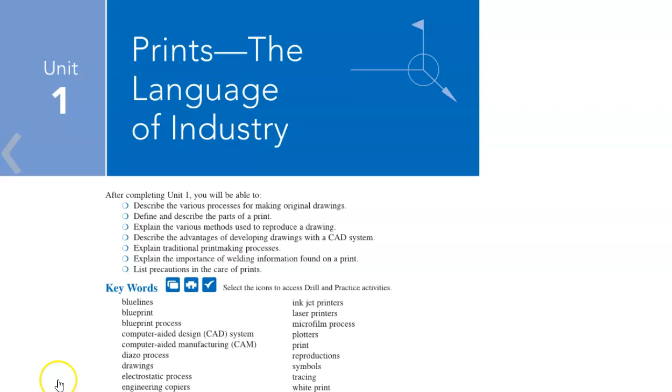Unit 1, Prints: the language of industry.

Drawings are used by the welding industry to communicate ideas in graphic or picture form. Drawings are often the only means of showing the construction of complex products and structures. Drawings are called the language of industry.

It is a precise language that utilizes symbols. Symbols are lines and figures that have meanings to accurately describe the shape, size, material, finish, and fabrication of an object. The symbols are standardized and used as a universal language around the world. This standardization makes it possible to interpret and understand drawings made in other countries.

Original drawings are seldom found on the job site or in a factory. They would soon become worn or soiled, making them difficult to read. Also, workers at different locations producing the various parts or sub-assemblies of the product or structure each need a set of drawings. This means that several sets of identical drawings are needed at the same time. Drawing a set of plans for each person who needs them is impractical because of the cost.

Creating new originals to replace drawings that are damaged or ruined is also costly. Reproductions or prints of the original drawing or CAD model are used in these situations to ensure quality in the production and fabrication of parts. Version control of the prints is critical. Prints often will have a version or revision number that indicates the most recent print revision.

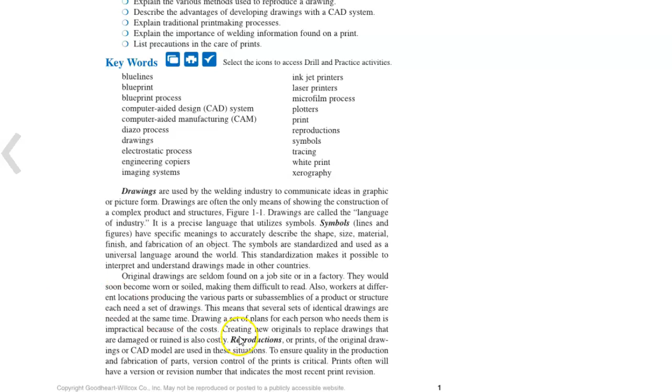Evolution of making prints. Before the development of computer-aided design, or CAD, systems, a high-quality original drawing had to be created. The original drawings needed dense and uniform lines for good reproductions. Manual drawing or drafting was an important skill used to create these drawings from ideas developed by engineers and technicians. However, manual drafting was time-consuming and editing required redrawing.

Now, drawings are most typically created using the tools of a computer-aided design system. A CAD system is a combination of hardware and software that allows drawings to be drawn, viewed, and output, printed or plotted electronically. CAD software programs provide drawing, editing, and dimensioning commands and other functions for use in developing original drawings.

Manual drawing techniques are sometimes also used. However, the process is slower and less accurate than using a CAD system, and the quality of the drawing is dependent upon the drafter's technique.

CAD systems: the growth in the computer field has had a direct and significant impact on the drafting field. The CAD system allows the designer to modify and manipulate the original drawing quickly. Instead of paper and pencil, the changes are made on a computer screen and saved on the storage media of the computer. The saved drawings may be transmitted electronically or retrieved and made into paper prints.

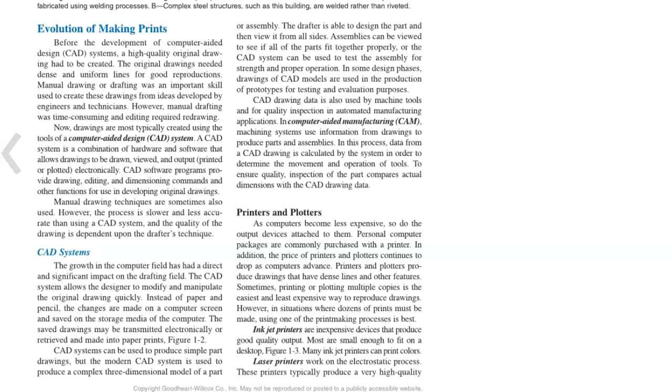Laser printers work on the electrostatic process. These printers typically produce a very high quality image. Many laser printers are capable of printing large size drawings while maintaining a high quality image. Color laser printers are common.

Plotters are most commonly used to make paper drawings from CAD work. There are two types. Inkjet plotters are similar to inkjet printers, except they are used for large format prints. Pen plotters use pens to reproduce object lines. These devices duplicate the motion that a human hand might make while drawing. In other words, they draw lines instead of printing dots on the page.

Pen plotters produce high quality work, but they are fairly slow. Both inkjet and pen plotters are capable of color output.

Older methods of reproduction. Tracings were commonly made by manual drafting when prints were needed. The first step in making a tracing is to draw the part on a translucent or somewhat see-through material. Many types of this material are available in sheet or roll form.

Many drafters made original drawings on the tracing material that would be used to produce the copies. For more complex jobs, the layout was usually traced from the original drawing. This is where the term tracing comes from.

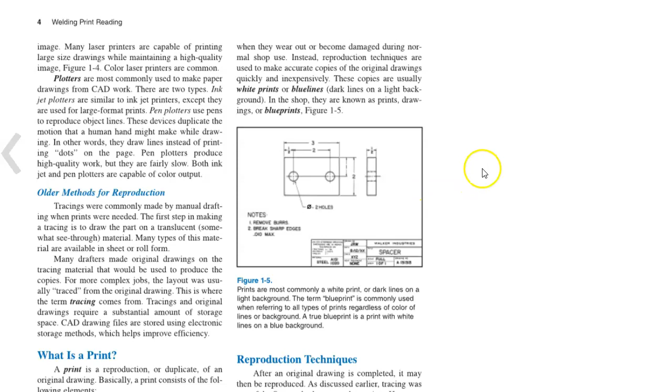Reproduction techniques. After the original drawing is completed, it may then be reproduced. As discussed earlier, tracing was one of the first methods to reproduce prints. However, now prints from CAD drawings and models are generated electronically by a computer.

Drawings can also be reproduced by using xerography or making microfilm from drawings. Older printmaking processes employ a chemical reaction to produce prints.

Xerography is a printmaking process that uses an electrostatic charge to duplicate an original. This xerography process is commonly called the electrostatic process. This process is based on the scientific principle that like electrical charges repel and unlike charges attract.

The electrostatic process exactly duplicates the original. A copy can be enlarged or reduced in size from the original if needed. Unlike older processes, the original drawing does not have to be on translucent material.

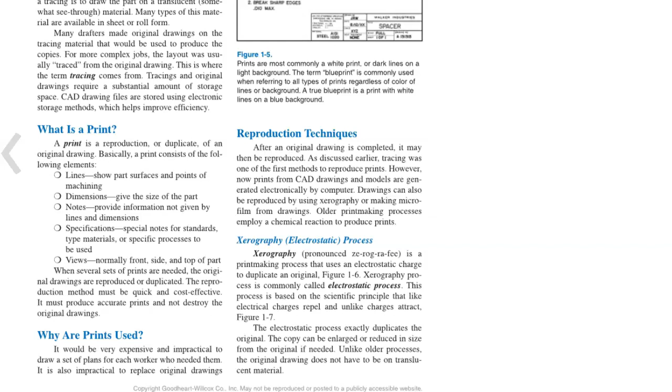Large format engineering copiers can quickly reproduce original drawings. Some computer networks are connected to imaging systems. These systems receive drawing information from electronic files created with CAD software or special graphics software. The imaging system is able to prepare the printing materials and control the size and resolution of the reproduction.

Full color copies can be made on color copiers. This is an important capability in CAD drafting because color may be used on final prints to identify items such as welds, wires, piping, and other materials.

The microfilm process. The microfilm process was originally designed to reduce storage facilities and protect prints from loss. With this technique, the original drawing is reduced by photographic means to negative form. Finished negatives can be stored in roll form or on cards.

Cards or film are easier to store than full-size drawings. To reproduce a working print, the microfilm image is retrieved from the files and printed onto photographic paper.

Older printmaking processes. There are two older traditional printmaking processes: the Diazo process and the blueprint process. As CAD drafting becomes more prevalent, more prints are generated electronically. This has caused a decline in the use of Diazo and blueprint processes. However, you should be familiar with these two processes.

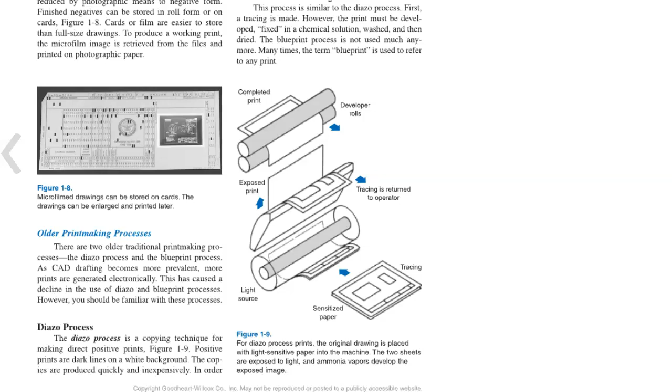In order to use the process, a tracing of the drawing must first be made on translucent material, usually tracing paper or film. A Diazo print is made by placing the tracing in contact with light-sensitive paper or film and exposing them to light. Light cannot penetrate the opaque pencil or ink lines drawn on the tracing.

Exposure takes place when light strikes the light-sensitive coating of the print paper. The print paper is developed after exposure by passing it through ammonia vapors. Where the lines prevent the light from striking the paper, blue lines develop on the print.

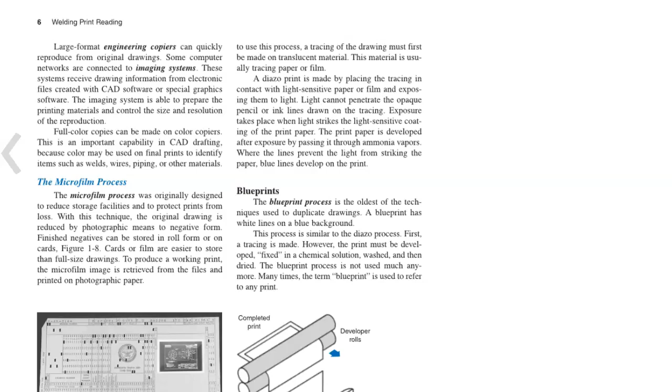Blueprints. The blueprint process is the oldest of the techniques used to duplicate drawings. A blueprint has white lines on a blue background. The process is similar to the Diazo process.

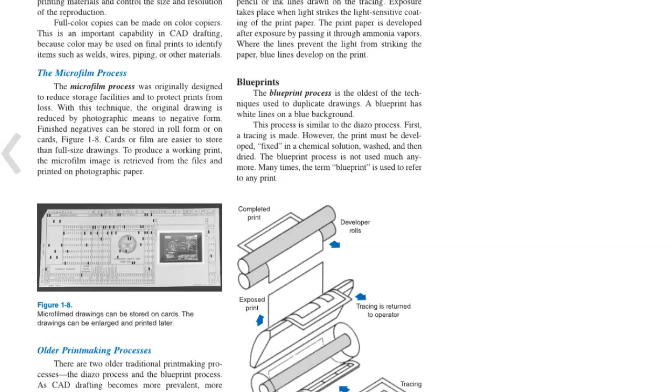First, a tracing is made. However, the print must be developed, fixed in a chemical solution, washed, and then dried. The blueprint process is not used as much anymore. Many times the term blueprint is used to refer to any print.

Electronic storage. Original paper drawings and prints were often stored in large drawered cabinets. Unfortunately, these drawings and prints were affected by light and dust, and they deteriorated over time. Many became unusable as a result.

With the advancement of computer systems, reliable electronic methods were needed to store CAD drawing files. The first electronic data storage systems used a variety of magnetic systems, including moving tape and disk. However, static storage systems such as flash drives have become more common.

Today, large amounts of data such as CAD files can be stored on a single small electronic device. CAD files are large and require specific formats to ensure proper storage, retrieval, and file exchange. There are many file storage and exchange standards.

A few common CAD file formats include International Graphics Exchange Specification (IGES), Drawing Exchange Format (DXF), Stereolithographic (STL), and Additive Manufacturing File Format (AMF). Each of these file formats is used to move data from CAD systems to computer numerical control (CNC) machining tools, or 3D printers. Through file exchange, CNC machines or 3D printers can produce parts from the CAD model.

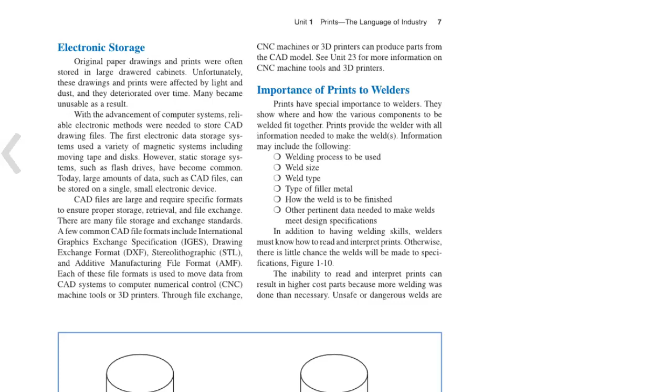In addition to having welding skills, welders must know how to read and interpret prints. Otherwise, there is little chance the welds will be made to specifications. The inability to read and interpret prints can result in higher cost parts because more welding was done than necessary. Unsafe or dangerous welds are possible since incorrect print interpretation could result in weak or rejected welds that do not meet design specifications.

Care of prints. If given proper care, a print will have a long, useful life before it must be discarded. The following is a list of precautions used when handling prints.

1. Keep prints clean. Avoid setting food or drinks on prints. Dirty prints are difficult to read and can cause errors when welding. 2. Avoid tearing prints. Fold and unfold prints carefully when you use them. 3. Avoid laying tools and other objects on the prints.

4. Do not make revisions or changes on a print unless you have written authority to do so. 5. Some prints are concerned with work that is secret or classified in nature. Handle and store these prints according to company and agency security policies. Penalties for ignoring security precautions can prove costly to you.

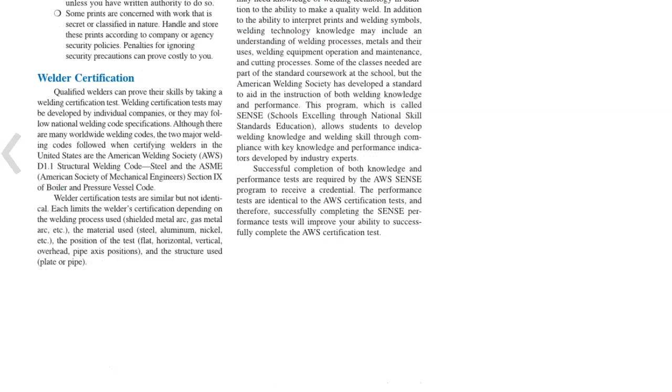Welder certification. Qualified welders can prove their skills by taking a welding certification test. Welding certification tests may be developed by individual companies or may follow the National Welding Code specifications. Although there are many worldwide welding codes, the two major welding codes followed when certifying welders in the United States are the American Welding Society (AWS) D1.1 Structural Welding Code for steel, and the ASME American Society of Mechanical Engineers Section 9 of the Boiler and Pressure Vessel Code.

Welding certification tests are similar but not identical. Each limits the welder's certification depending on the welding process used, for example shielded metal arc, gas metal arc, etc.; the material used, carbon steel, aluminum, nickel, etc.; and the position of the test—flat, horizontal, vertical, overhead, pipe axis positions—and the structure used, whether it's plate or pipe.

Test welds are usually destructively tested or bent, and specific acceptance criteria is used to evaluate the bend test specimen. Upon successful completion of the test, the welder receives documentation or certification indicating the limits of the certification.

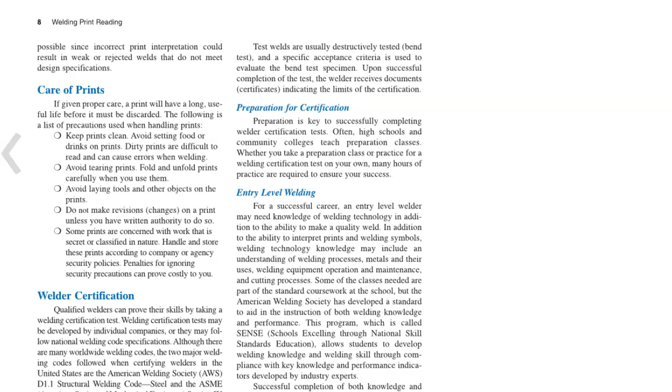Preparation for certification. Preparation is key to successfully completing a welder certification test. Often high schools and community colleges teach preparation classes. Whether you take a preparation class or practice for a welder certification test on your own, many hours of practice are required to ensure your success.

Entry-level welding. For a successful career, an entry-level welder may need knowledge of welding technology in addition to the ability to make quality welds. In addition to the ability to interpret prints and welding symbols, welding technology knowledge may include an understanding of welding processes, metals and their uses, welding equipment operation and maintenance, and cutting processes.

Some of the classes needed are part of the standard coursework at the school, but the American Welding Society has developed a standard to aid in the instruction of both welding knowledge and performance. This program, called SENSE—Schools Excelling through National Skill Standards Education—allows students to develop welding knowledge and welding skill through compliance with key knowledge and performance indicators developed by industry experts.

Successful completion of both knowledge and performance tests are required by the AWS SENSE program to receive a credential. The performance tests are identical to the AWS certification tests, and therefore successfully completing the SENSE performance tests will improve your ability to successfully complete the AWS certification tests.